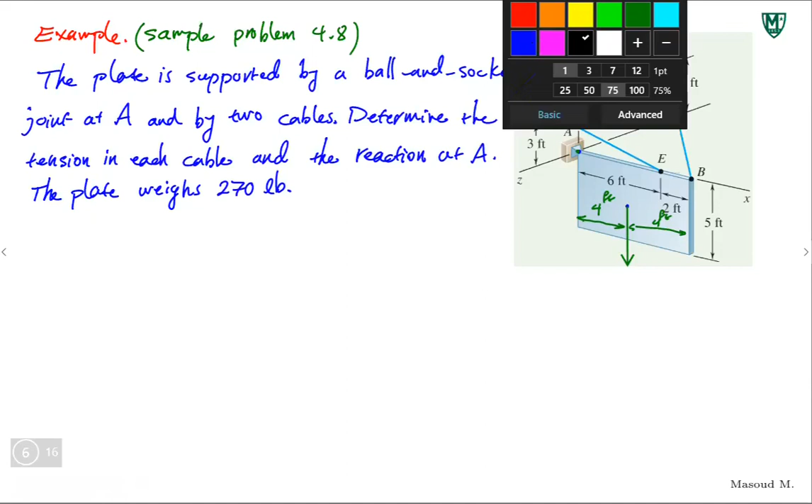All right, let's start with where we always start, right? Free body diagram. Always start with a free body diagram. Draw the free body diagram, put all the forces on your free body diagram, all the knowns and unknowns, and look at this structure or the rigid body, and then take it from there. So let me attempt to draw a free body diagram, at least a plate as close as this one.

All right, forces. Obviously the weight is there, applied to the center of gravity, center of mass, downward. I have two cables, right, BD and CE. And I said they're in tension, so obviously the direction should be in this direction, right? When they are in tension, they're applying a pulling force to the structure. And let's put this one here.

Let me put the names. This is W, so let's call it W. It's 270 pounds. This would be T BD, from B to D, and this would be T EC, let's say from E to C. All right, so far so good.

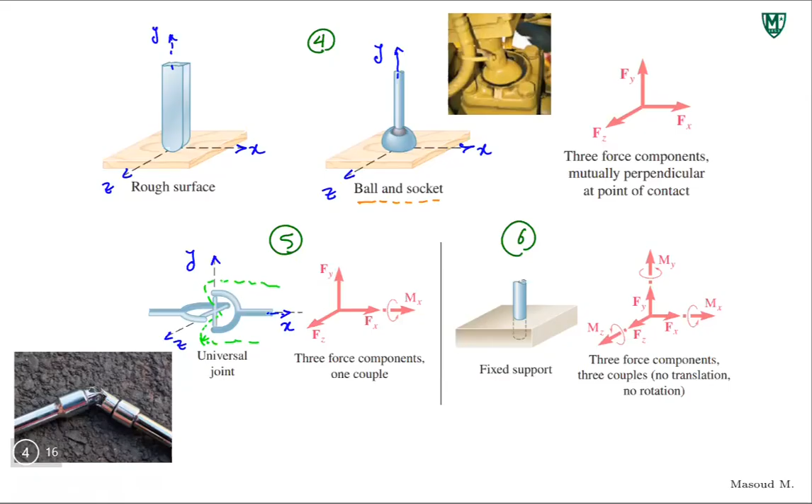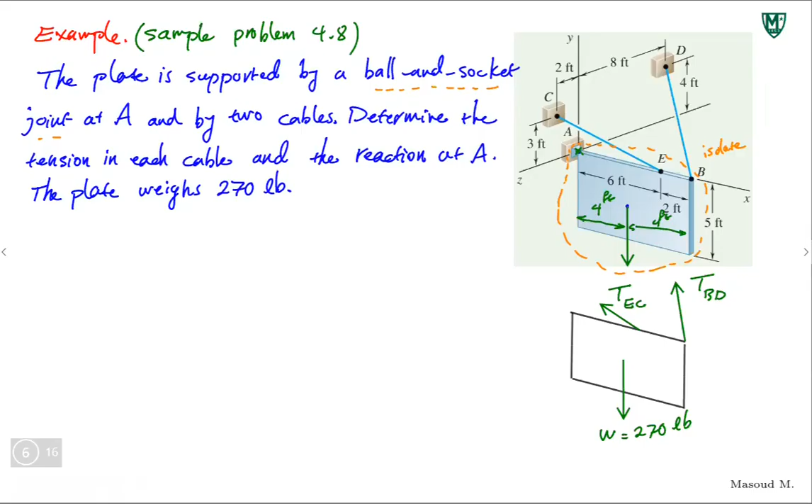So keeping that in mind, I'll go back here. I'll try to follow the same way that the book did it. This is point A. So I'm getting rid of this support. Now I'm compensating for that support using three components. Right? Let's put this upward.

Again, the directions when you are putting the support reactions are not important. Because if the direction is incorrect, at the end, you're going to get a negative value. If the direction is correct, you get a positive value. So if you get a positive value after analyzing the structure, it's a confirmation that the direction you assumed was correct. I'll put this one in this direction.

And let's put this in this direction. Yeah, I guess that's how the book did it, so just stick to that. Let's call this A. Oh, these are the coordinates on our system. They're given X, Y, and Z. It's a right-hand rule. Go from X to Y, should give you Z. So that would be AY. This would be AX. This would be AZ. Just name those. You can use whatever name you want.

All right. I can also try to put the axes on this, with the danger that things get messy, but let's just try. Let's call this X, this is Y, and this is Z. All right. So I have my free body diagram now. The next step, what we were doing always, right? Once you have your free body diagram, you have to start representing everything. We are in three-dimensional space, so you have to represent everything in Cartesian coordinates.

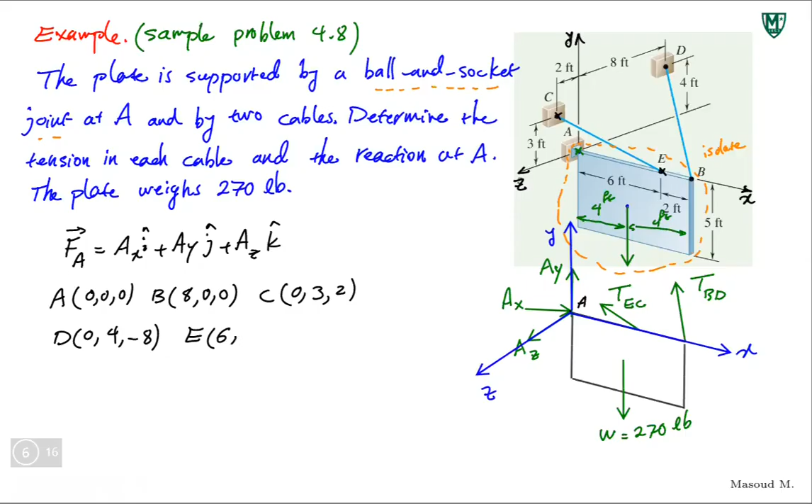Let's also do that for points D and E. Point D, X is 0, Y is 4, and Z is minus 8, exactly, since point D is on the negative side of the z-axis. Point E only has an X component, right? So 6 feet in X direction, 0 and 0. I don't know if I need it, but let's just write this too. I'll call that point F.

We're going to need this later, where the center of gravity is, or where the loading is applied. You'll see later on why we need that. So what is the coordinate of this point? This is also halfway through. I'm making it very messy here, but this is halfway through this, so this is 2.5 feet. So what would be the coordinate for point F? 4, minus, exactly. Thank you, Richard. 4, minus 2.5, and 0. So now we have the coordinate for point F.

All right. Let's keep these here. I'm going to keep going back to these points, so I'm just going to separate them from the rest of the story. So I wrote F in Cartesian. Now I want to write TEC in Cartesian coordinates. TEC would be the magnitude of TEC times the unit vector EC, so I'll find the difference between each component for these two points. 0 minus 6 will give me minus 6i. 3 minus 0 will be 3j. And 2 minus 0 will be 2k.

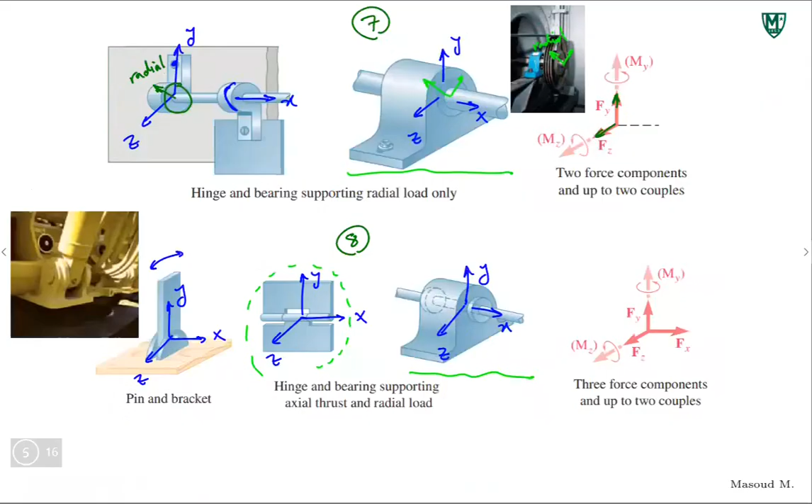Point A. Yes, Richard, right? A, exactly. Why? Because we have the most number of unknowns. And remember, when we are finding a moment about a given point, if the line of action of a force is passing through that point, the moment about that point is 0 for that force. So if I find the moment about point A, AX, AY, and AZ are going to be out of the picture. They're not going to create any moments.

So let's do that. But keep in mind, if I want to do it, what do I need to know that I do not have now? I'm finding the moment. Let me just write it first. So let's find summation of moments about point A, which is equal to 0. Well, in this case, we're in 3 dimensions, so just take it as a vector.

All right, so if I want to find the moment about point A, well, I have to find RE cross TEC, right? And RE being the position vector from point A to any point on the line of action of TEC. Now I'll choose the easy point. I'll choose it here. I'll call this RE, position vector for TEC. Because I need R, the distance that any point on the line of action of that force has from the point I'm finding the moment about.

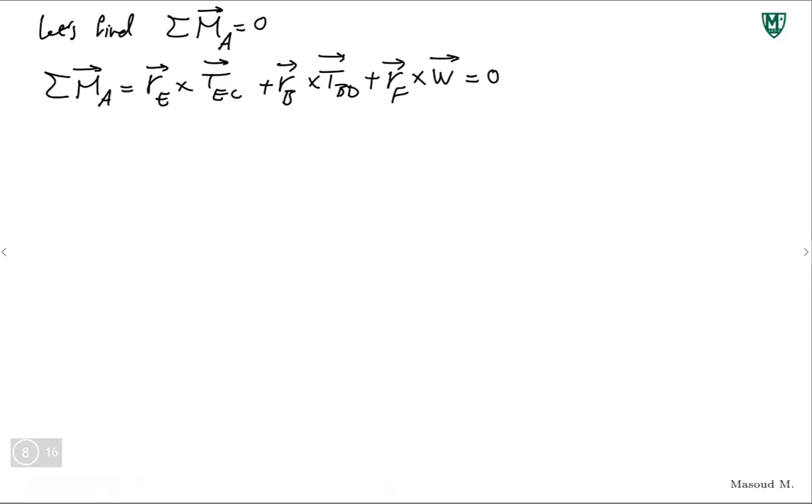All right, so I already have the representations of TEC, TBD, and W in Cartesian coordinates. I have to write RE, RB, and RF in Cartesian coordinates. That's what I need. So RE, RB, and RF. These are what I want. Now, looking at this free body diagram and the coordinate system, you tell me, what is RE? It's a vector from A to point E, exactly on the x-axis. And it's a position vector, exactly, 6i. Thank you, Elizabeth. So this is 6i.

What is RB? RB, going from point A to point B, again on the x-axis, 8i, exactly. Thank you, Richard. That would be 8i. Now, how about RF? RF actually is in the XY plane. It has a component in X direction and a component in Y direction. It has no component in Z direction. And it starts from the origin. So how do I represent RF in Cartesian coordinates? 4i minus 2.5j, exactly. Thank you, guys. 4i minus 2.5j. Make sure that everybody saw that.

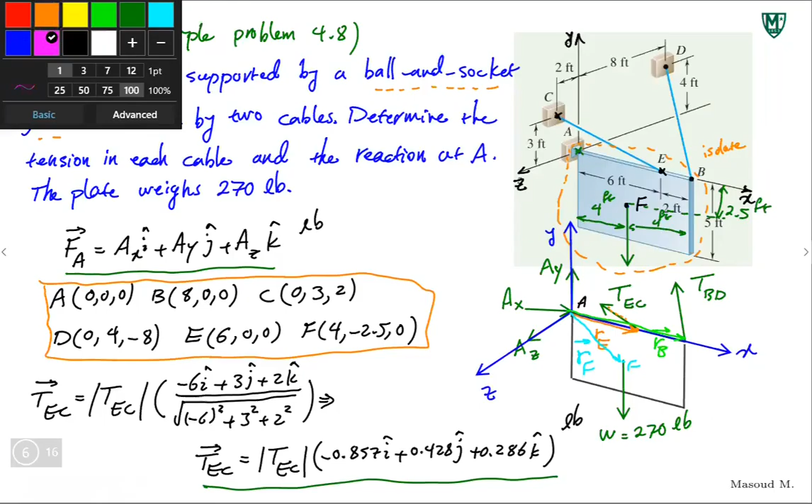So it has two components, right? In X and Y. Let me just do it here so it's less crowded. This is RF in X direction. This is RF in Y direction. RF in X direction is 4. RF in Y direction is minus 2.5, since it's along the Y-axis in the negative direction. So that'll give me 4i minus 2.5j. All right. So now we can find these.

Let's go one by one. Call this 1, 2, and this is 3. From 1, very nice color code following. All right, so orange 1 would be RE cross TEC. How do we do this cross product? Well, the first row would be I, J, K. RE has only 6, a component in I direction, so these two are 0. And TEC, if we go back to TEC we had from before, the I, J, K components, just plug in there.

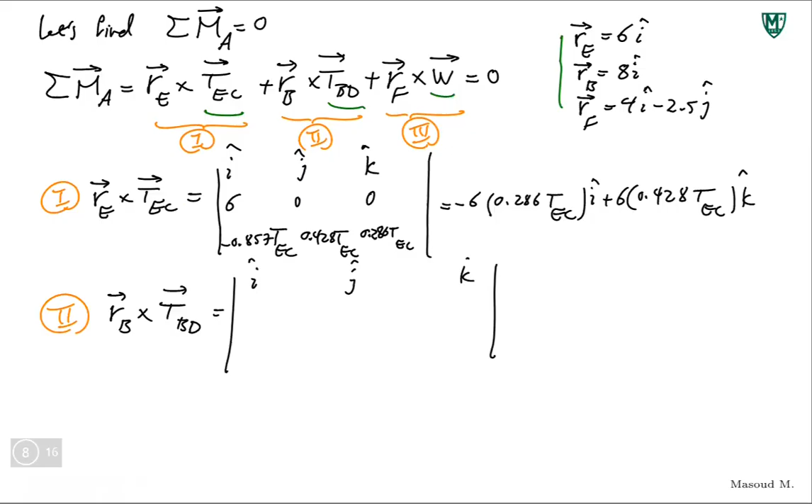Same story for the second one, right? We'll get RB cross TBD. This time I learned my lesson. Let's make it bigger. I, J, K. RB is 8, so let me just put 8, 0, 0. And the components of TBD, we have those components from before, right? We found them here. So just plug them there.

That will be minus 0.667 TBD. For one, isn't the I unit supposed to be J? Yes, it should be J. Thank you. Exactly, it should be J. This is J. And that's how, my friend, you lose points on the exam, right?

0.333, thank you, Bobby. 0.333 TBD, and then minus 0.667 TBD. If you do this, get rid of this one, this should give us minus 8 times minus 0.667 TBD J plus 8 times 0.333 TBD K. All right.

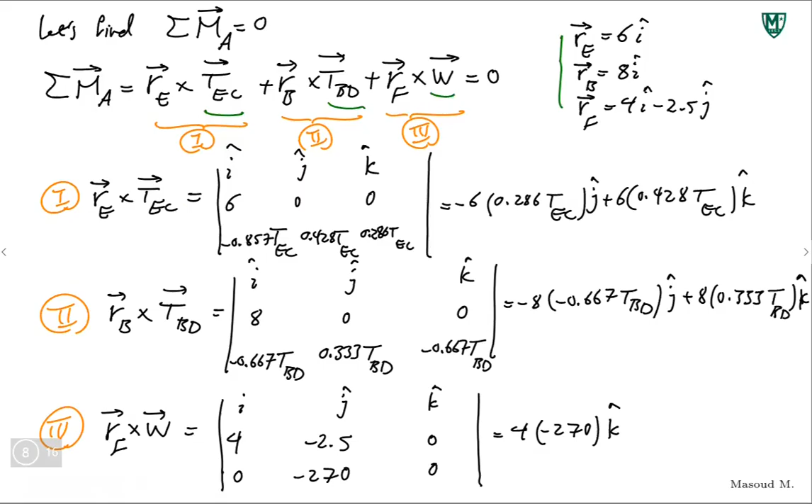All right. So we calculated all the components for the moment about point A. All we need to do is just put them together. There is no I component, so just sum up the J components and sum all the K components. So if I want to write it again here, the summation of all moments about point A should be 0. I actually did the math there.

So minus 1.716 TEC plus 5.336 TBD would be the J component, plus 2.568 TEC plus 2.664 TBD minus 1080 would be your K component, equal to 0.

Since this is equal to 0, all the components should be equal to 0. You could just write this directly without the vector form and set every set of equations equal to 0. This will give you 5.336 TBD minus 1.716 TEC equal to 0. It's easier if you're using a calculator. For the K side, 2.664 TBD plus 2.568 TEC is equal to 1080.

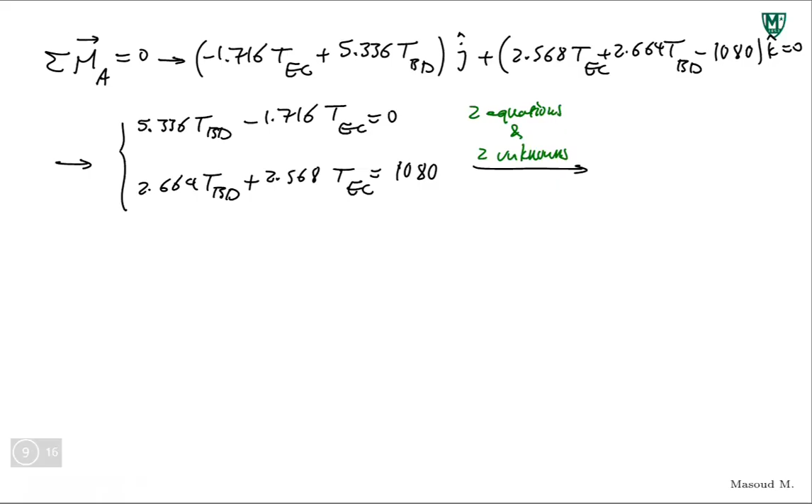Now this is two equations and two unknowns, right? Let me write it here. Mathematically speaking, once you have two equations and two unknowns, you can find the values. You do the math, I'll give you the final answer. We can also check the textbook. TBD becomes 101.41 pounds, and TEC, remember, these are the magnitudes, 315.354 pounds. So we found TBD and we found TEC.

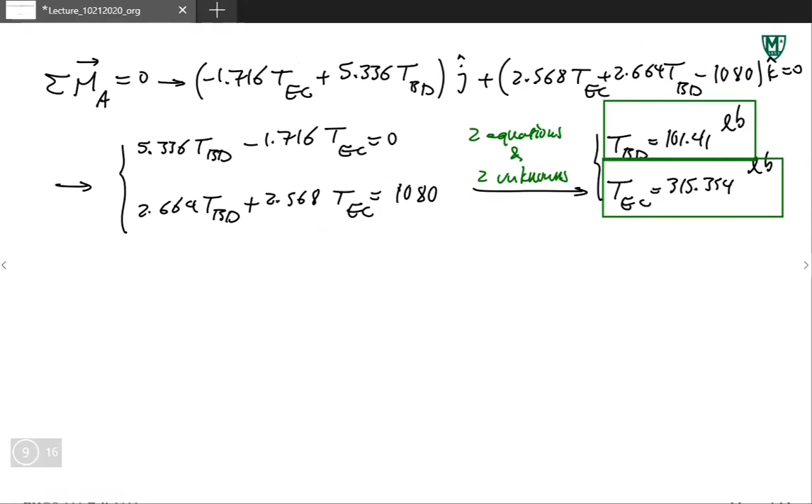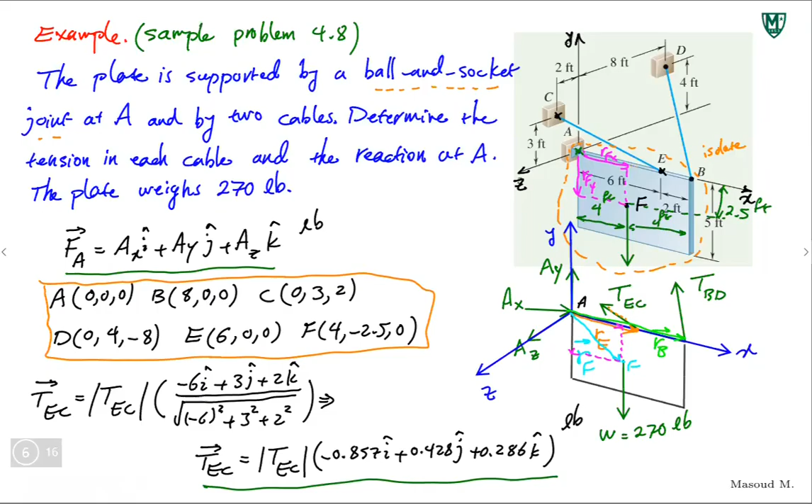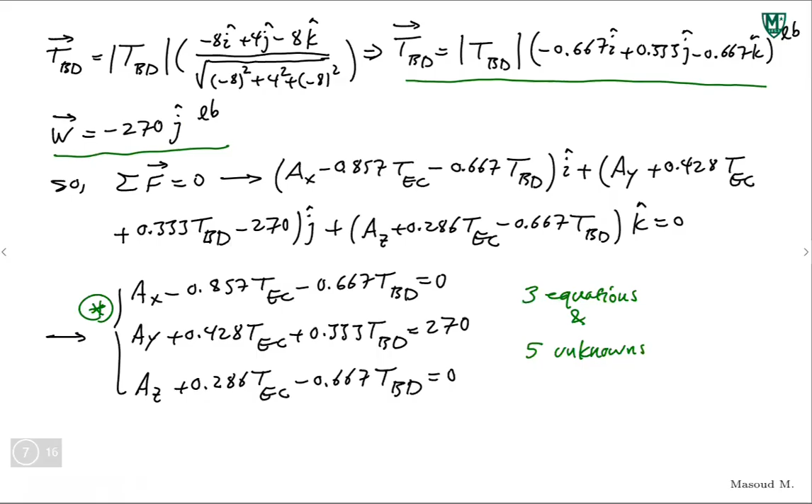Now, if you look at the problem statement, we were asked to find the tension in each cable, which we did, and now we have to find the reaction at A. For reactions at A, we go back to this set of equations. We had 3 equations and 5 unknowns. We now have TEC and TBD, so we can just plug them in here, and from the first equation we'll get AX, from the second AY, and from the third AZ. As easy as that, because that set becomes 3 equations and 3 unknowns.

So from star, AX, AY, and AZ, let me just give the final numbers: AX is 337.9 pounds, AY would be 101.228 pounds, and AZ would be minus 22.58 pounds. You can represent FA as a vector: 337.9 I plus 101.228 J minus 22.58 K. And that would be the reaction at A. This is also in pounds.